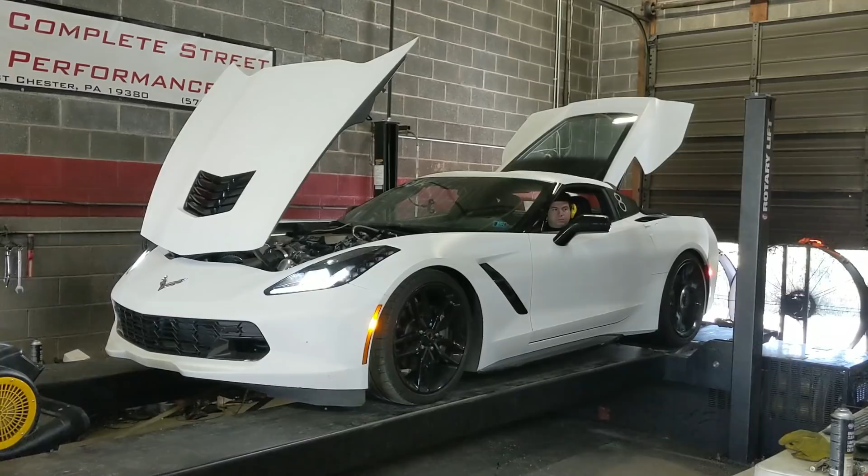So today what we're going to be doing is we're going to be hooking this car up to HP Tuners, and I believe he's going to be remote tuning it.

I'm making a baseline tune so these guys can actually install the Fuel Injector Clinic 1000cc injectors, as well as the LS9 map sensor. Without the tune, you guys would be unable to start this darn thing. So we're going to fix that right now. We're going to get it ready to go, and this is going to be based off of a lot of the cars that we've done here. As you guys know, we tune like thousands of cars.

And I actually have a very good baseline, a car with roughly the same setup, just with ID 1050X injectors and a camshaft that's kind of like mid-range, 227, 244 camshaft that we've done. So hopefully it should line up pretty darn close, since they are both Procharged cars with ideally the same stuff. I'm going to make that tune right now. We're going to send it off to the shop that's working on it and see how it works.

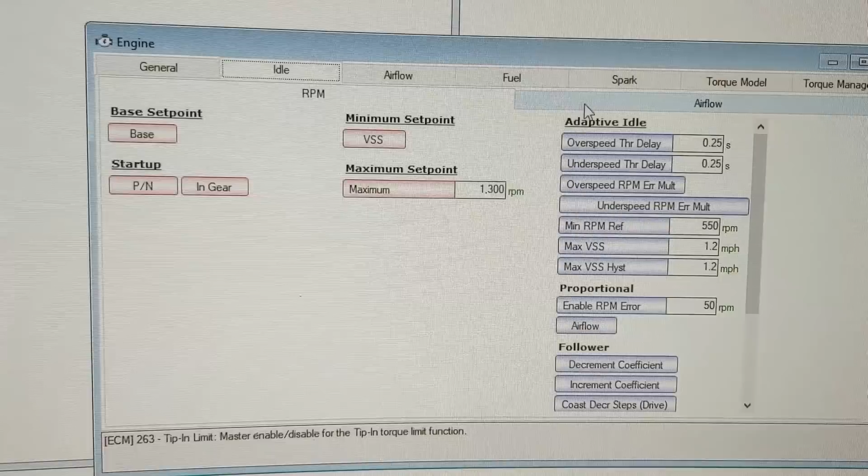As you see, we are making some good changes. Everything in red is what we've changed so far. We're making some good changes to the setup. The only thing that I need to change here is we need to put the LS9 map sensor data in, because that is not the right data. That's an LS, I have no idea what map sensor that is. It's probably a T map for Ford or something stupid there.

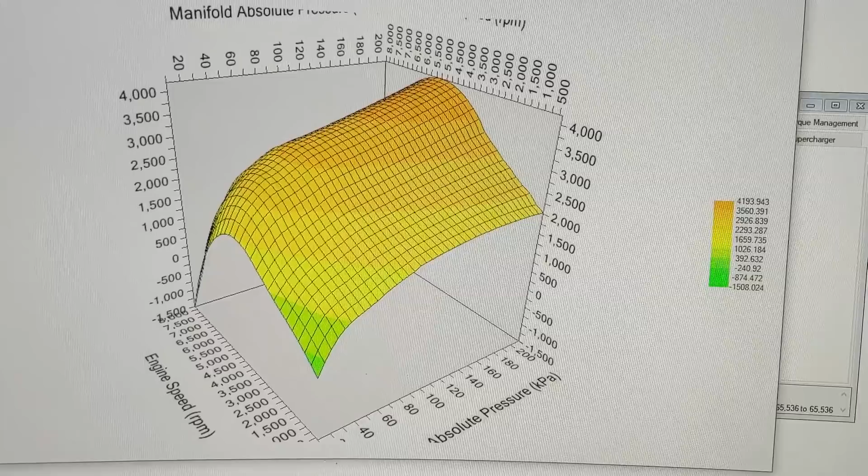And we've also even done the speed density side of things. So behind the scenes, now this is just a generated kind of table that we're gonna see if it lines up or not. I have some very cool ways that we can do this remotely, but the table before, oh my god, it was so bad. In fact, I want to show you the table before. So this is what the table looked like before.

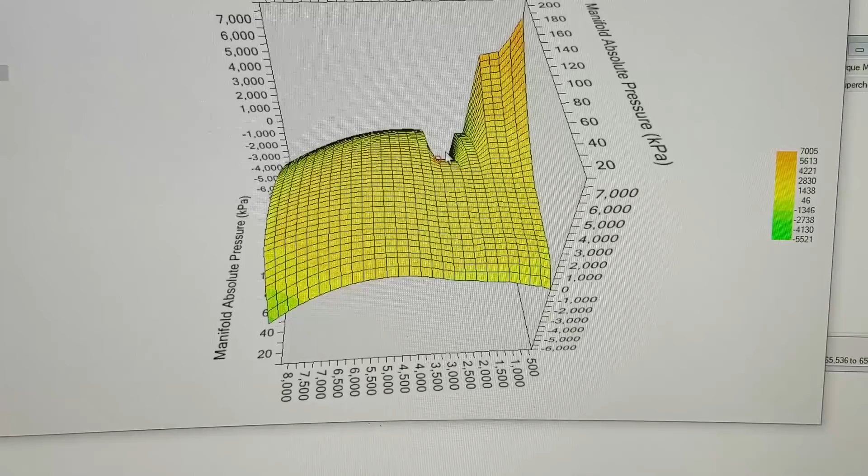If you guys see this, these are negative numbers. Now there are points where the factory does that, but yeah, look at that. That is horrible. Like, I mean, if you can generate negative numbers in here, and you've actually worked this table, that means that you have a perpetual motion machine, because you're going to be creating fuel. Silly.

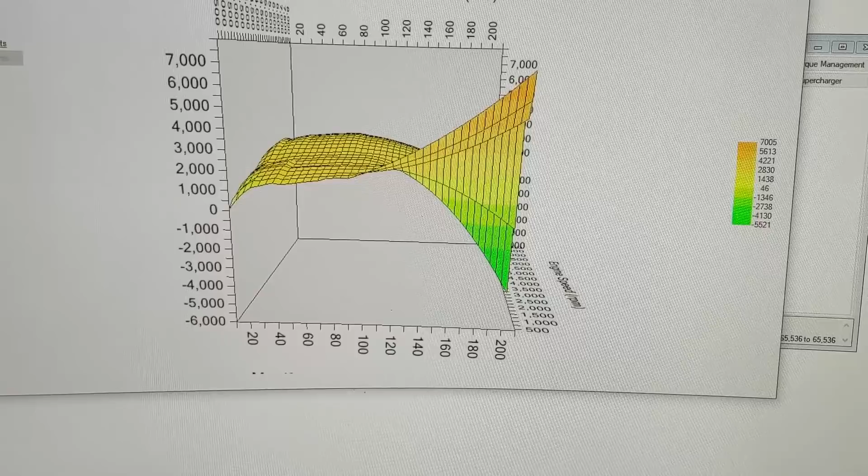But so we are fixing all that and getting a nicer table in here. So it is very important that you have the right data, and now we don't know exactly what the right data is at this point, because, well, we're remote tuning it and we have no feedback yet. This is one of the problems with one of those handheld tunes, that you don't get feedback. But we will be getting feedback from Gavin in the shop that is working with him, and ideally we'll have this thing dialed in as if it were here.

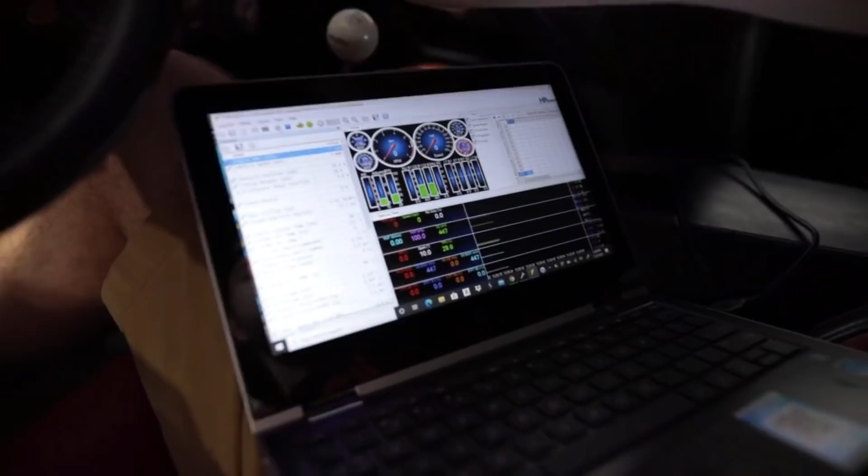So now I'll start the car up, hopefully. Right now, Doug's got the car data logging. That way we can send up the startup, everything like that over to Andrew just to make sure everything's dialed in properly, but it sounds really good. It started up no problem. Like I said, Andrew at CSP knows what he's doing, so I'm not surprised in the slightest.

Okay, so we just got feedback that they did start the car up and are running it, and it's fired right up and idles fine, so that's good. That means that our base for an unknown camshaft must be pretty good. They sent a log. So I'm going to go through that log right now. Just send it off right now. You should be seeing that in a sec.

The entire time warming up is good because I can still have some usable data from there. It looked like it was good. Like I saw up to 160 some, 162 I think it went up to. And yeah, I just want to see it go all the way up. It's funny because right where you shut it off, at like 160, it hits 162, and then it starts trimming differently, and then you stop the story right then. And I'm like, no, what happens? I need to know. Okay, sounds good. Chapter 2. Load this thing on first, though. Okay, sounds good. Okay, see it.

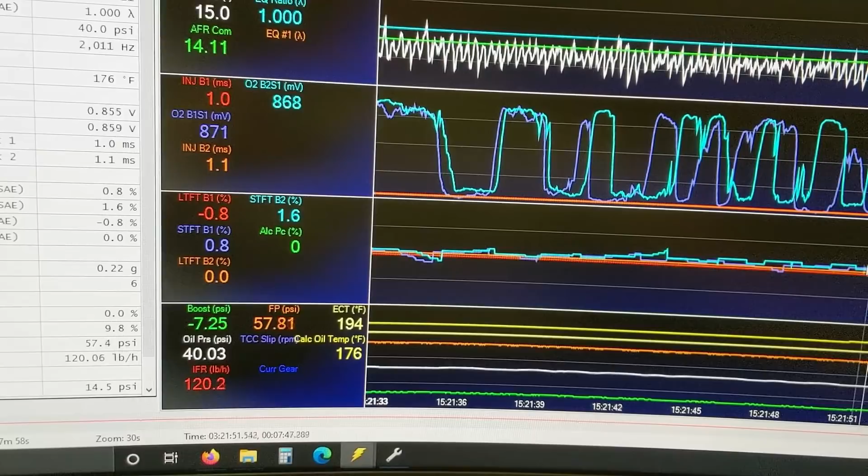The base tune was really good. Okay. Excellent. The thing is just about perfect. I'm specifically looking at the long-term fuel trims up to temp, and it is like dead nuts on. Like it is within 1%, so that's an incredible baseline. I'm pretty happy seeing that right now. So that within 1%, that just means that the computer has to correct within 1% of where I've set the tune to be what it believes is accurate based on the O2 sensor data. It's incredible. That's a great one.

I'm going to tell them, let's get some logs on the street now and start seeing what it does, just cruising around, and then we'll start working our way into full throttle and start relying on some of the wideband data. Until then, we're going to rely on the factory O2 sensor data.

Andrew from CSP just got back to us from that data log and let us know that it is looking very good. So what we're going to do next is take the car out for its first pull. We're doing a pretty much half throttle pull in third gear, and we're gonna see how it looks from there, and then so on and so forth with data logging until tuning is complete.

I swear drivability is better now than it was, and that is with this clutch in there too. That's a twin disc clutch in there. That tune is just dialed in so much better now that it's easier to drive. It's insane because this car has been down for like 2 months and I have not gotten to really do anything at all with it.

Really though, drivability feels amazing on here. Downshifts and rev match is perfect. Sounds a lot better. I know it sounds way better downshifting now than it did ever before though, I'll say that much. He is very good. That was surprising. He very quickly got this thing literally running and driving, feeling perfect.

This thing still drives almost like stock. I'm not even joking around, like I actually am pretty impressed. This is one of the best files I've ever seen, for a base file especially. Ready?